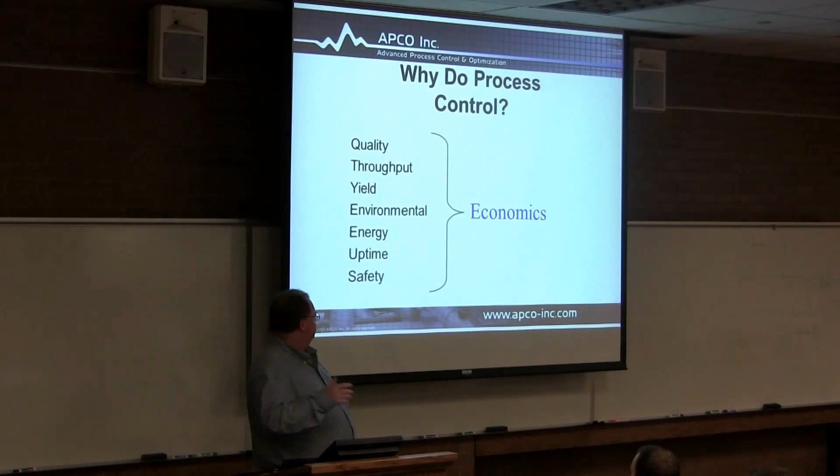You guys know what uptime is? How much time it's actually running? Yeah, the fraction of the time it's up. You know, so you want to keep it up all the time, right? As much as possible. And safety. You want to do it safely. Okay. Come on.

Building a plant or doing process control or anything else is almost always the same. Okay? Who here has had any experience in construction? Any? Who's seen a house built? What's the first thing they do when they build a house? They dig. What do they put in that hole? Basement. They put up walls. They put in a good foundation. They put on a good floor. And then they start working their way up, right?

So this is kind of like, oh, that's a great page. My backup page. So this is very much like what we do in chemical engineering. You guys have gone through all these classes that teach you how to build reactors and distillation columns and tanks and towers and pumps and pipes and all the other stuff.

By the way, when I would drive by a refinery, you guys driven by refineries? Aren't they sexy? Us chemical engineers, when we go by refineries, we get excited. All right? I'm just telling you. I don't know about you guys. I drive by and I see all those pipes. Oh, man. What kind of pipes are those? I have to tell you, it's great.

Okay, so we put together all those pipes and towers and tanks and all this other stuff in the plant. And then what do we do on top of that? What do you put on a foundation? A frame. In this case, you're going to put on some instrumentation because as good an engineer as you are, you think if you just put in pipes and all this other stuff, it's just going to run? Is that what happens? You just put it in and snap your fingers and all of a sudden there's stuff running through it? Is that the way it works? No, you have to have instrumentation.

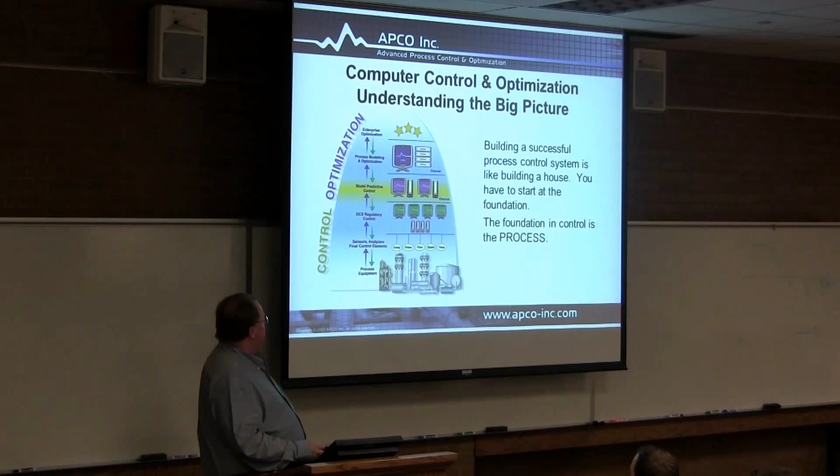Okay. What Dr. Hedengren wanted me to concentrate on today is how you use your engineering skills to be a good process control engineer. Let me just tell you right now that the key to good process control is getting the control and the process to work together. The key word in process control is process. If you understand how the process works, actually the control becomes very easy. You guys may think that's kind of odd right now as you're starting to study Laplace transforms. Why do you study Laplace transforms? Anyone know? No? Builds character?

You know, I have a Dodge Durango, and I drive up on the curb sometimes. My wife says, "Why'd you do that?" Because I can.

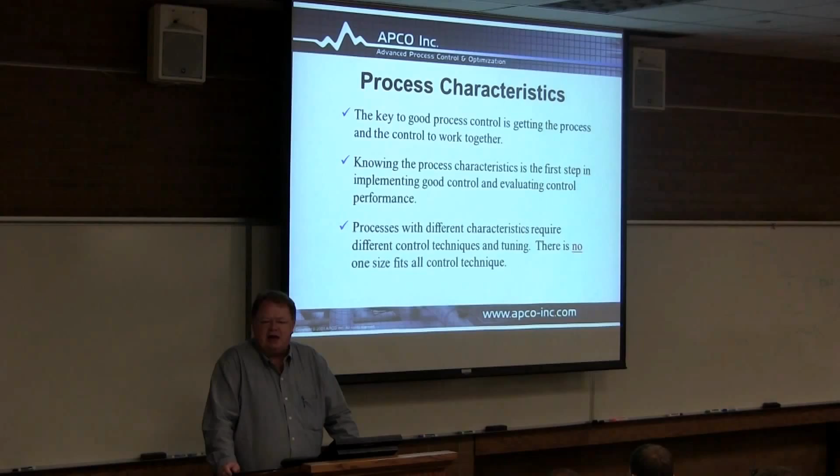That's why, you know. Go ahead, I saw a hand going back there. Why do we do Laplace transforms?

Laplace transforms turn ordinary differential equations... Who likes solving ODEs? No. Okay. Turns ODEs into algebraic equations. Which would you rather solve, an ODE or an algebraic equation? Yeah. That's what I'm talking about. Okay? So just know why you're doing it.

Okay? In the real world, when you go out and do process control like I have for the last 25 years, I've probably done 5 Laplace transforms in the last 25 years. Okay? But for the stuff that you're doing right now, learning about modeling of processes and characterizing processes, you kind of need to know Laplace transforms. Okay? So it's a useful tool.

Knowing the process characteristics is the first step in implementing good control. Processes with different characteristics require different control techniques and tuning. There is no one-size-fits-all control technique. Okay? So what's the key to getting good process control? Understand the process.

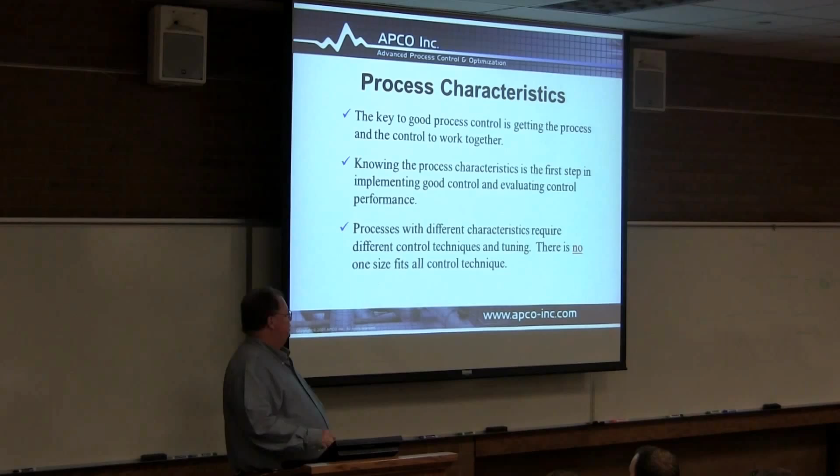So if I want to control a distillation column, who would I need to go to? A chemical engineer, right? Or a reacting system. Who's going to be best at that? Probably a chemical engineer. If it's a fluid flow or a pump or a heat exchanger or a mechanical system or manufacturing system, would a mechanical engineer be good? Absolutely, okay? But can a chemical engineer do those kinds of systems? Yes. Okay? So there's more breadth. You guys should be proud of that. That's one of the things we have.

The goals of process control are to stabilize the process, reject measured and unmeasured disturbances. Whatever you do in your design in heat transfer or chemical kinetics or whatever, except for maybe a few minor problems, almost everything you do is what we call steady state, right? You design a CSTR, steady state. PFR, what's a PFR?

Hey, you guys are my heroes. All right, y'all passed the entrance exam to APCO. That's not real hard. Okay?

So, anyway, a plug flow reactor, any kind of thing like that, it's always designed around steady state. How many processes do you think actually run at steady state? Zero. None. Okay, so they design them around steady state. This happens all the time. They pay me big bucks to go out to refineries, chemical companies, things like that, to do P&ID reviews. You guys know what a P&ID is? Process and instrumentation diagram. And they say, tell us what's wrong with the controls.

And the guys that design the controls are the guys that do all the steady state stuff. And they say, you know what? I can control the vapor pressure on this front distillation column because it's connected all the way down through the process to this intake. So I'll control the pressure down there, and that controls the whole thing. And I go, okay, and I shake my head. I say, shame, shame, shame. No, I don't really say that, but I think it, you know. And then they start criticizing me. Now you see how the whole thing goes.

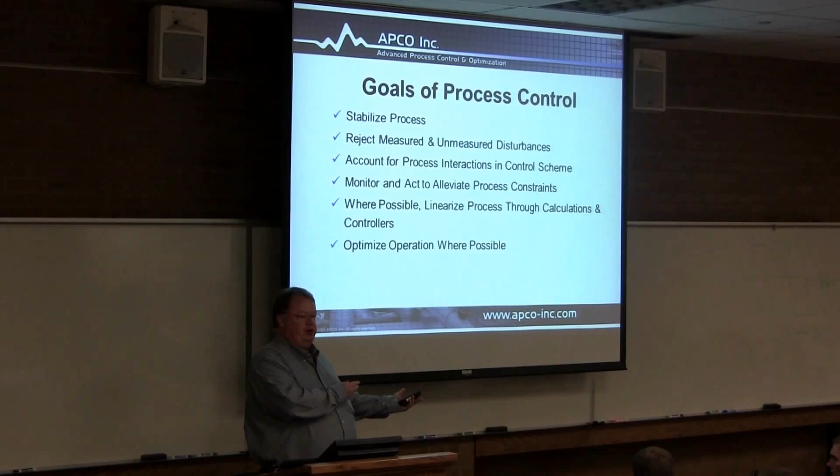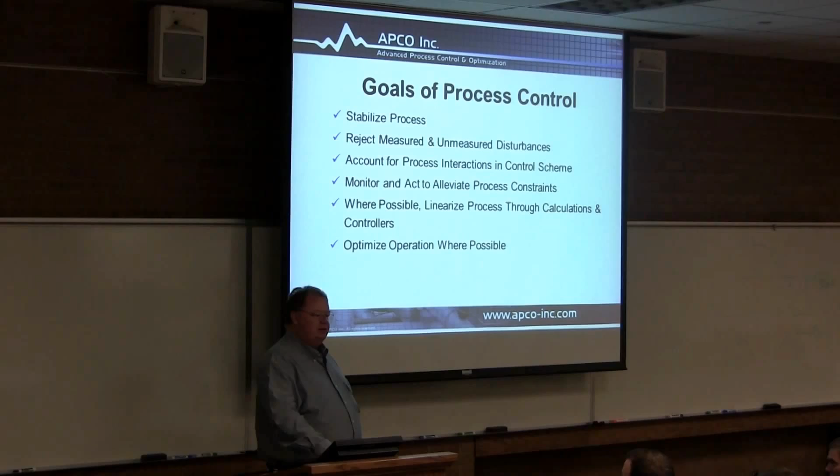How many of you have ever had a car that had a carburetor on it? It's gone from like 98% of the class to one guy. That's how old I'm getting. I'm telling you, it's bad. It's really bad. Okay, the carburetor... You hit the gas hard right at the front end, and what happens?

Nothing. If you hit the gas hard on the front end of a refinery, nothing happens. What are you going to do? You're going to hit it harder, right? You're driving your car, you push the gas, nothing happens. What do you do? Push it harder. So then when it finally catches, how fast are you going? Too fast. A little too fast.

Okay? So understanding that and just understanding the relationship between when I make a manipulated variable change, when I make a change in the process, and how it affects the process, not only at steady state, but between now and steady state is an important concept, right? That's what you guys are learning about. It's a very important thing. We account for process interactions in a control scheme.

How many of you guys have ever been in a home with two showers? Or with a shower and a toilet? You're in the shower, the toilet flushes, what happens to the water temperature? Huh? Ice cold? Who said ice cold? Not unless your toilet's hooked up to the hot water. I wouldn't want that. All right, that's not good.

So being able to reject that interaction would be nice, wouldn't it? Okay, that's what we do. So we say, hey, look, we know if this is going to change, this is going to change. And we can take that into account. How do we know what's going to change? Intuition. Oh, intuition. That's a good guess. You sure you're a senior? Go ahead. That's experience in the plants. That's experience. Oh, we're better than that. We know what's going on with the process, right?

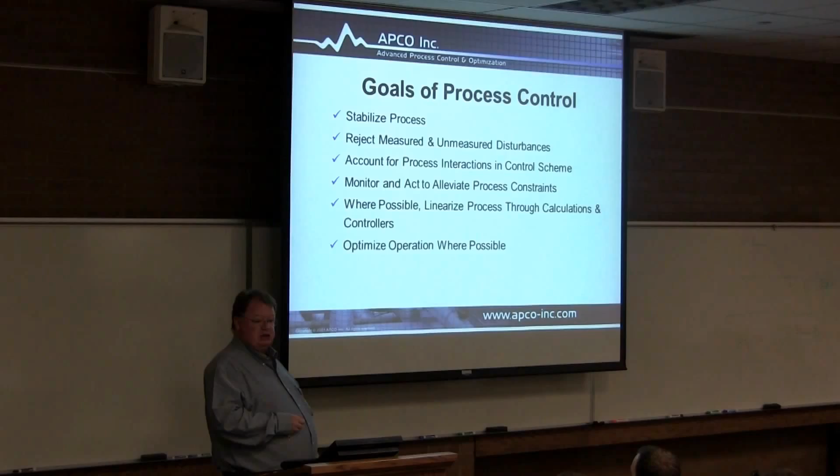One of the reasons why we like to reduce variability is because we like to come up almost always at the optimal place. The TA is the optimizer, Mr. Optimizer there. The optimal place to run a plant is almost always at a constraint. Why do I say that? Anyone have any ideas? Why is the optimal place almost always to run at a constraint? If I design a tower or a plant to run at 10,000 barrels a day, they usually want to run more than 10,000 barrels a day in that plant. Why? They make more money.

See, the capital cost, the cost of the tank, the cost of the pumps, that's a fixed cost, right? But I know for every barrel I put in, I'm going to make money on it coming out, right? So how many barrels do I want to push through there? As many as you can, right? See how that works? It's really quite simple. You say, hey, I want to push as many as I can. Pushing as many as you can means you're going to push that refinery harder and harder until you do what? Break it. Until you come right up to the edge, you break it, right?

You don't want to break it, because if you break it, it stops, right? If you break the car, it stops. Yeah, I had a friend. I like motorcycles, but we go out single track in the mountains. I had a friend who bought a KTM 300, and he was so proud of that KTM, it was really fast. He was actually an employee of mine, he used to go riding all the time.

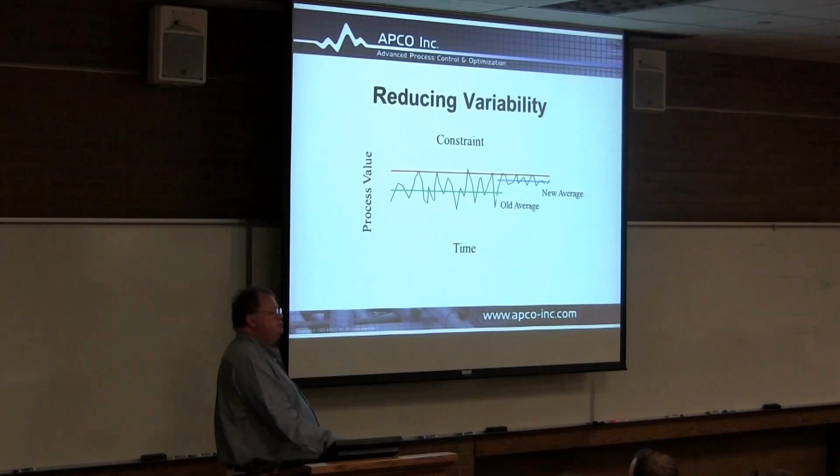So there's the difference. If my process is bouncing around like crazy, and I reduce the deviation by half, what's my new average flow? See, I'm closer, aren't I? Is there any money in that? How much? Like pennies, nickels, dimes? Let me come back to that slide in a minute.

Because isobutane has got very high octane. And it can also be used in other chemical reactions to make things called alkylate and other things that are high octane. So the value in 1995: 65 cents a gallon versus 30 cents a gallon for normal butane. I said, look, if I can reduce your standard deviation by 50% and reduce the loss of isobutane by 2.3%, that ends up to be $312,000 a year. That's off of one distillation column.

So this is for the Flying J, or now Big West Refinery, up in North Salt Lake. When I went in and did the analysis, I thought I could make you $500,000 a year on the whole gas plant. So they said, okay, go ahead and do the project. We don't believe you. It's just computer programming. How much can you really do, right? Changing the control software. So I estimated I could make them $500,000 a year.

You know how much I made them? $1.2 million a year, costing about $100,000. So if you give me $1, I'll give you $10 at the end of the year, would you do it? Pretty good return on investment, isn't it? That's the kind of stuff that process control does. But I'm trying to focus on how your engineering skills can help you work.

How many of you in here know about the Antoine equation? Every hand in the place should go up, right? You learned about that in material and energy balances. What does the Antoine equation do? Vapor pressure. So the Antoine equation can give us information about vapor pressures in a distillation column. So if I increase or decrease the pressure in a distillation column, the separation changes.

So the problem is that they want to control the temperature to control the separation, but the pressure is jumping all over the place. That's a disturbance to the separation, isn't it? So we did what we call pressure compensated temperature. You see this black line in the bottom is the analyzer. That's the amount of isobutane going out the bottom. That's how much they want to go out, based on a steady state analysis.

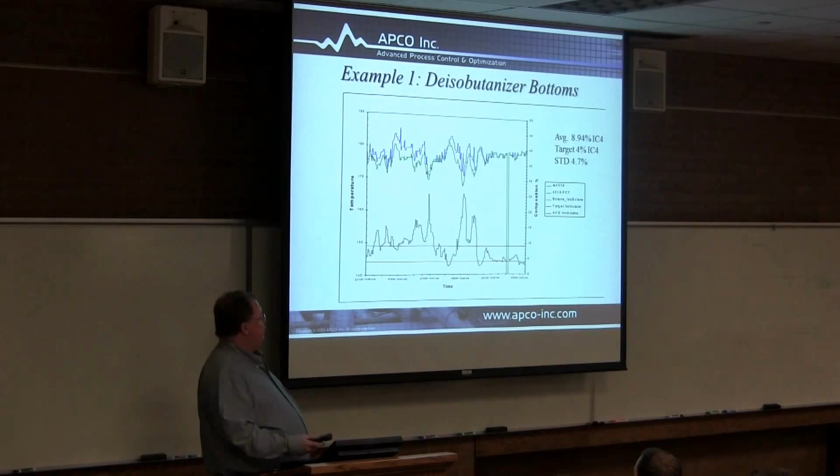Does that make any sense to you? That's pretty good money, isn't it? Would that pay your salary for a year? Probably would. It would for multiple years if you were working for me. Be like a decade. Sorry, no, that's not true.

I have to try to beat the stereotype, right? So here's another one we did. I did one down in Sweeny Refinery down in Texas. We did a propylene splitter. You guys know what propylene is? Yeah. What's propylene used for? Polypropylene, plastics. Okay, valuable stuff.

This is 1995 dollars. Oh, that's the same one. Next slide. Come on. Come on.

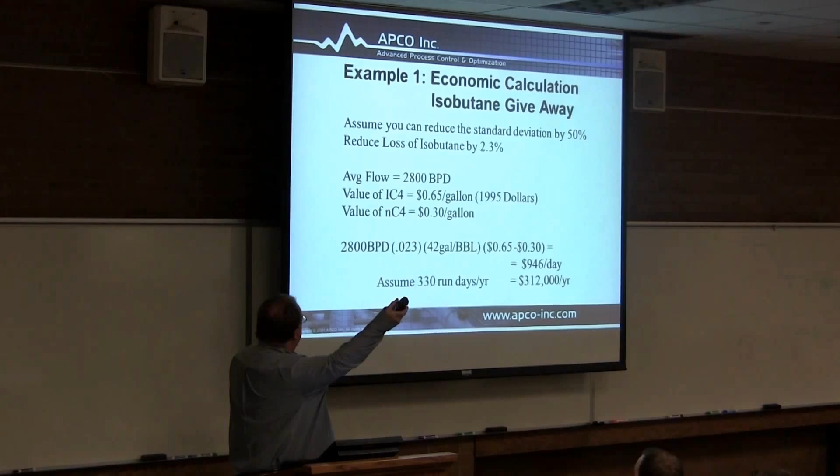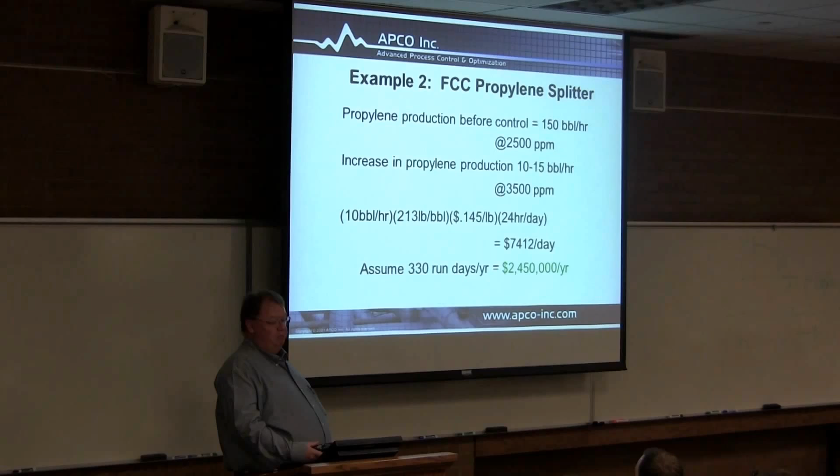Anything to sneeze at? When we started doing work at the Big West Refinery, they were barely profitable. Okay? But because of the process control and because they kept adding processes that made them money, they're now an extremely profitable refinery on the orders of multiple hundreds of millions of dollars a year profit. Okay? So if you can walk in and you can say, hey, look, I can do some things for you, you're going to be a hero.

Do these companies usually come to you first, or do you go to them and say, hey, I can make you some money? You know, I've been in business for some time now, but I'm not a very good businessman. That tell you something? Okay. I'm an engineer, I'm not a good businessman. I'm actually not a bad businessman, but I don't do some of the things that are good. I don't go out and knock on doors. It's just not in my nature. I'm a pretty outgoing guy, but I find it hard to knock on someone's door and say, hey, look what I've got to show you. So the way I do it is they call me up with a problem, I go in and help them solve the problem, and then I educate them.

So a big part of what we do in process control and what you'll do as engineers, I'll guarantee you, is education. There's a salesman component in every engineer's job, every single one. I don't care where you work or what you do. You're going to have ideas, you're going to have things you think you want to get done. You're going to have to sell someone on those ideas, okay? You're going to have to help them to understand that it's worth their while. Economics is almost always the best way of doing that. There's safety and other things like that that can do it, but economics is the best way to do that. So thinking about things in terms of economics and how to do the economic analysis to justify.

So on this one I made some assumptions, didn't I? I assumed I'd be able to reduce their standard deviation by 50%. I learned that from experience. Is that hard to do? No, not for me. It's trivial. If I'd have gone in there and said, I'll reduce your standard deviation by 90%, what do you think they would have said? Black magic, yeah, right, what are you going to do? We're better than that, right? But if you look at it, I probably reduced it by 80, 90%, okay? So you have to be realistic.

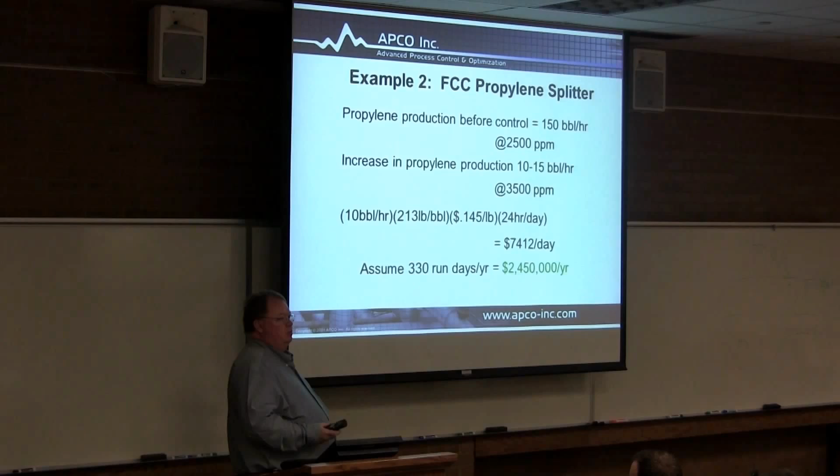They said, well, we've got a wish list of things that we wish our system did. I said, well, give us the wish list. We'll work on the wish list until we run out of money. They said, great. We got almost all the way through the wish list, and that was 12 years ago. Who's doing all the control work? We are. Okay? So being honest, one of the things about being who we are is being honest about your work. So you don't need to try to cheat people. Just because you can doesn't mean you should, right?

So I treat my employees, my clients, everybody the same way. I'm very, very open and very direct with them, which is a good thing on everybody's side. If an employee's not doing well, I'll tell him he's not doing well. I'll tell him why he's not doing well. We'll do what we can to help him get better. Right? Same way with the client.

I don't go to my clients and say, don't pay attention to what we're doing because this is top secret proprietary. I'd have to shoot you if you saw. That's not my approach. My approach is, yeah, have someone stare over our shoulder. Anything you guys can learn is great. It's your system. You want to know as much as you can about it.

Okay? The key to good process control is getting the process and the control to work together. Understanding the process is what engineers do. If it's a matter of saying, hey, it goes up, I'm going to open the valve, it goes down, I'm going to close the valve, I can train a monkey to do that. I don't need an engineer. I need an engineer because he understands the process.

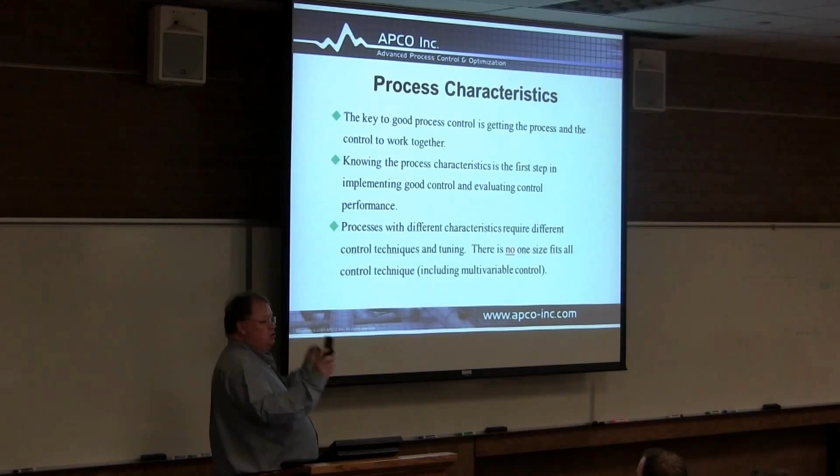Knowing the process characteristics is the first step in implementing good control and evaluating control performance. Processes with different characteristics require different control techniques. There's no one-size-fits-all control technique, including multivariable control, which used to be considered the solution to all control problems. Now I'm going to go through just a little simple example. We're almost out of time.

Self-regulating process. These are the two most important things you need to know about process control, the two most important process characteristics. If you pay attention to this next 5 minutes, you're going to be a superstar. Whenever I go into a refinery or a chemical plant, almost anywhere, they're all doing PID control. It's a standard, 90-95% of control out there is PID control. And they're trying to use PID control on everything. For the most part, it works pretty well. But you have to understand what you're controlling.

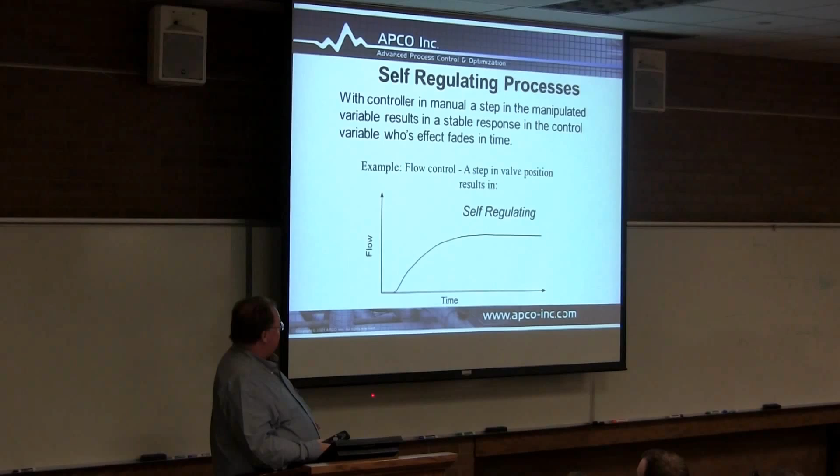Is the process self-regulating? What I mean is if I open a water valve a little bit, what happens to the flow rate? It increases and stabilizes out at a new value. If I open it a little more, it increases and stabilizes out at a new value. That's self-regulating. If I increase the heat to the bottom of a distillation column, the temperature goes up and stabilizes out at a new temperature. Does that make sense? It's called a self-regulating process.

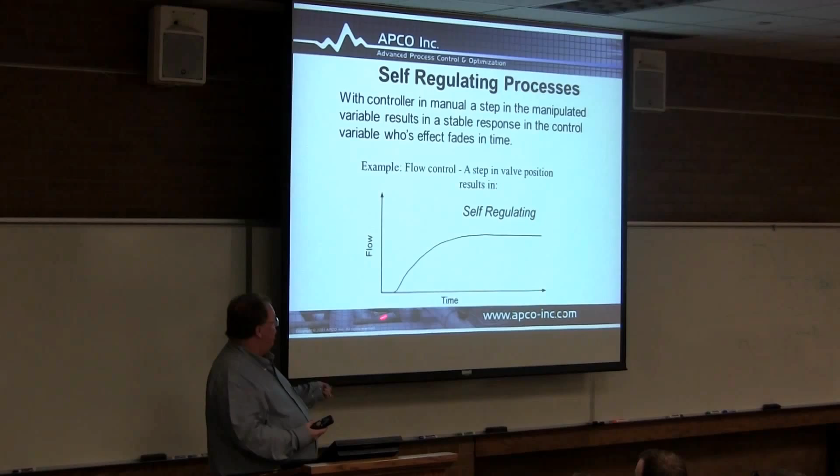In a self-regulating process, you use P, proportional, integral, and maybe derivative if it's got a long lag time, but certainly PI control. You have to have the integral, otherwise you've got steady state offset. In an integrating process, I make a change. Let's say I have my level loop open. I make a change in my outlet flow. Let's say I increase my outlet flow. What's going to happen to my level? It's going to go down. How long is it going to go down?

Forever, until it runs empty. Or if I reduce the outlet flow, how much is it going to go up? Until it what? Do you see the difference in the reaction? So for an open loop step, one of them is self-regulating, the other one's integrating. In this particular one, if you have an integrating process, you use no integral control.

None. All right, now you guys can go out and save the world. That little technique probably got half of the benefits on that distillation column that I told you about. Just knowing that little bit. Okay, so you can study Laplace, you can study Bode, you can study all kinds of tuning techniques that you want to, but just knowing that will get you most of the way there. Okay? So how do you like that? That was 50 minutes? There you go, that's your lecture. Not a big deal, okay?

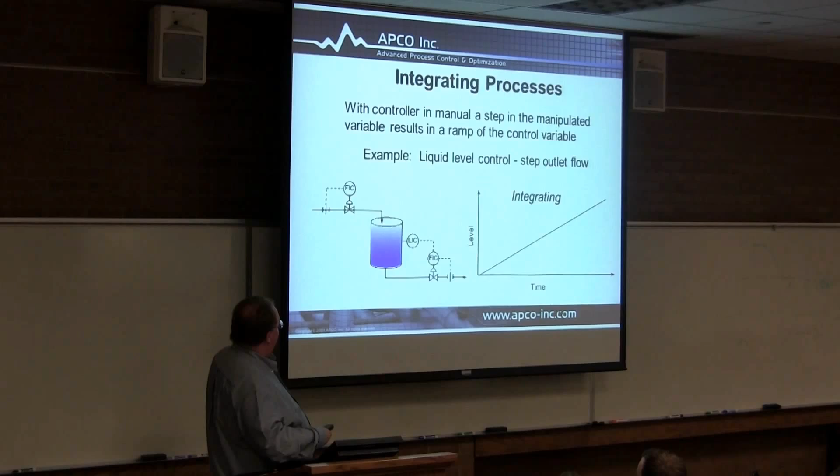Integrating processes use proportional control. Sometimes you can use a very small amount of integral action. When I say a small amount of I, I don't mean the I value's got to be small, because sometimes the TI is in the denominator. If you use a small I and it's in the denominator, how much integral action do you get? A lot. So you got to know if the I is in the numerator or the denominator. Right? We're really good engineers. You know if it's the numerator or the denominator.

It's another gotcha. Okay? If it's reset time, if they call it time, it's in the denominator. If they call it reset rate, it's in the numerator. Okay? Self-regulating process, P, I and D may all be needed depending on the relative speed. That's it. Okay? So that's it for that.

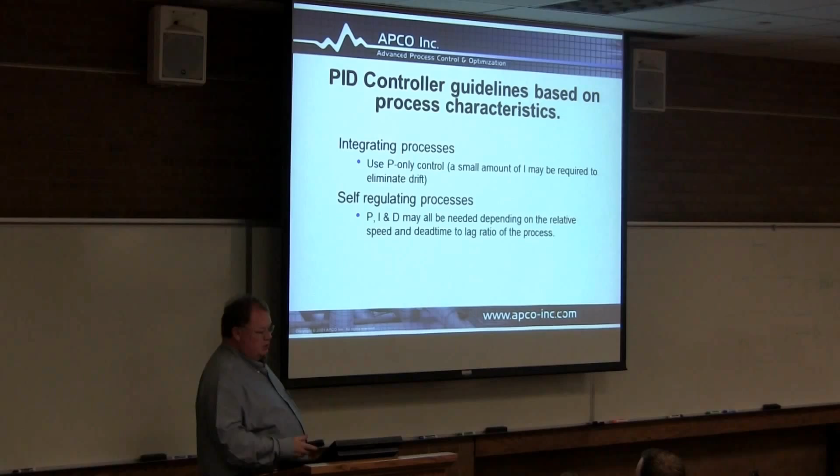Now what I want to do is just spend the rest of the time. I can talk about that, but I'm not going to. Okay? I want to spend the rest of the time answering any questions you guys have got about control, what's important, what's not important, or just engineering in general, chemical engineering.

We do work in just about any industry you can think of. Pharmaceuticals, manufacturing. So Hexcel, they make carbon fiber. We do a ton of control work out there. 3 of the 5 refineries on the Wasatch Front. The water industry, the pharmaceutical industry. We make gun safes. We do wastewater treatment plants. We do water treatment plants. We make cheese. We make dog food. We make, you guys name it.

Give me anything. Come on. Tell me something you think process control or chemical engineers don't have anything to do with. Anything. That's a challenge. All right, you guys? Diapers. Power bait. What? Power bait. What's in power bait? Chemicals. Okay, there's a lot of chemicals. There's artificial coloring, things like that. All those come from the chemical industry, right? Go ahead. What's next?

What was that? Hollywood. Have you seen the faces on those girls? That's all chemical industry. What else? Anything else? You know, I did this thing at the University of Utah, and someone said, prostitution! And I said, come on. You guys really want me to go into all the ways that the chemicals help those prostitutes? The bearded guy in the back.